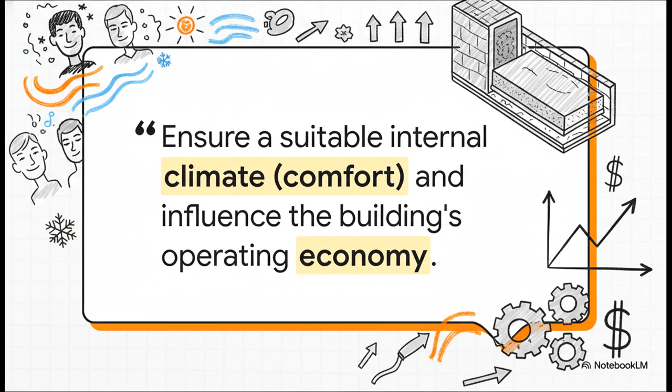All right, next up, you have to speak the language. Nailing these three key terms shows the examiner that you've got a solid grasp of the fundamentals. First is thermal conductivity, or lambda. Now, this is a property of the material itself. It's baked in. Just think of it as how good that material is at letting heat travel through it.

A low lambda value, like you'd find in insulation, means it's a poor conductor of heat. It's like a really thick, effective thermal sweater. Something with a high lambda, like steel, lets heat pass through super easily. This is the starting point for picking your material.

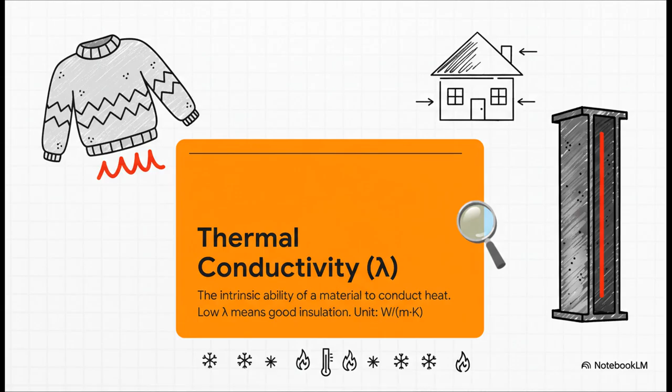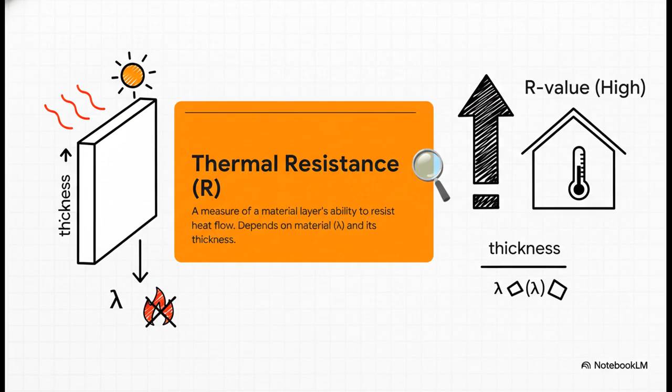Now, building on lambda, we get to thermal resistance, or the R value. This isn't just about the material anymore, it's about how you actually use it. The R value depends on the material's lambda and its thickness. So if you take a great insulator, something with a low lambda, and make it really thick, you're going to get a nice, high R value. This number tells you how well a specific layer in your wall is doing its job.

And that brings us to the U value. Think of this as the final grade for the entire assembly. It measures how much heat gets through a whole section of the building, like a wall with all its layers, or a window, or the roof. It takes everything into account. And for the U value, the golden rule is lower is always better.

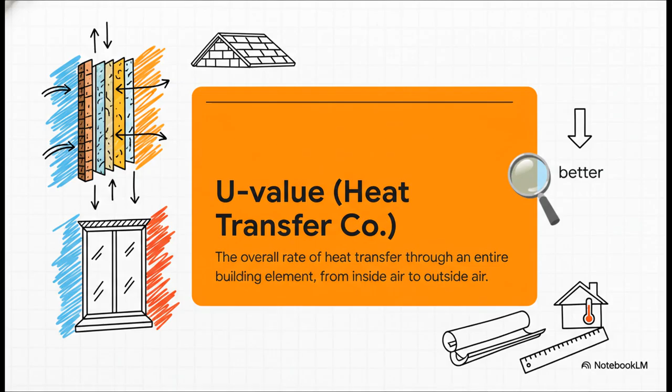It tells you how much energy you're losing, and this is the number that building codes and regulations are often built around. And these terms, especially that U value, are front and center in the official criteria used to evaluate a building's performance. As you can see, the U value is often listed right at the top, but it's part of a bigger picture that looks at everything from airtightness to overall thermal stability.

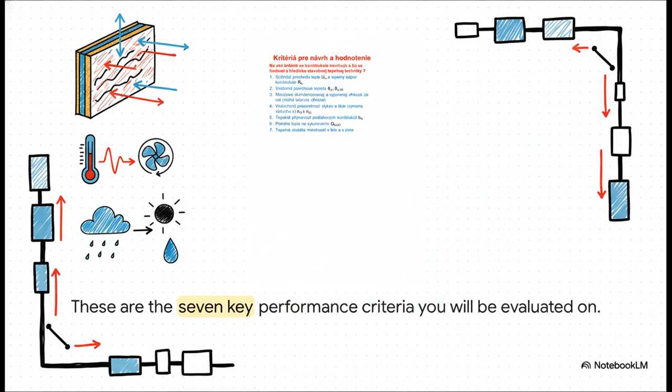Okay, so now that we've got the vocabulary down, let's talk about where things can go wrong. You can design a wall with a fantastic U value, but its performance can be completely ruined by thermal bridges. These are basically the weak spots, the Achilles heel of a building's thermal envelope.

So where do they pop up? Well, they happen anywhere that continuous layer of insulation gets broken, squished, or just isn't there. We're talking about corners, where walls meet floors, around windows, and a classic example is a concrete balcony that sticks right out of the building, creating a direct path for heat to escape.

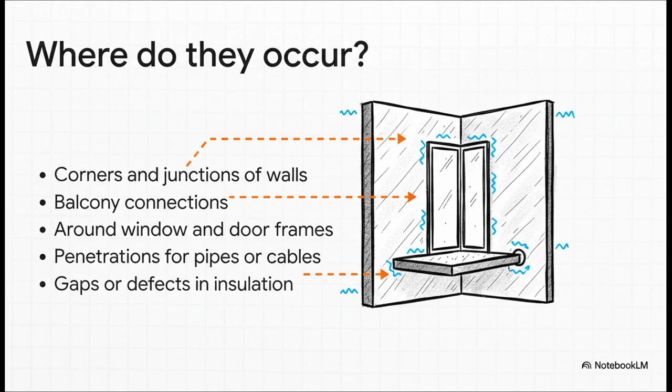This diagram here shows exactly what's happening. On a nice, flat wall, heat flows in one direction, straight out. But at a corner, the outside surface is bigger than the inside one, so the heat flow spreads out and it escapes much faster. It's literally a thermal highway for heat to leave your building.

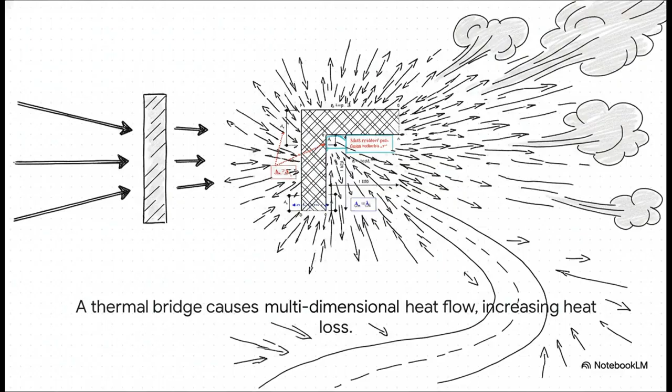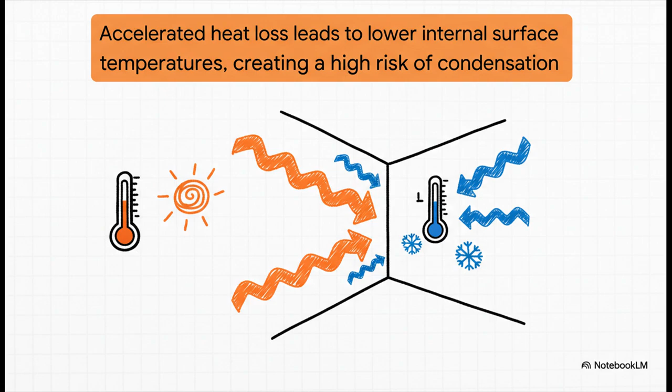And here's the real kicker. Because all that heat is escaping so quickly, the temperature of the inside surface right at that thermal bridge drops a lot. It becomes the coldest spot in the room. And that cold spot sets the stage perfectly for our next big problem. And that problem is condensation.

You see, warm indoor air can hold a lot of moisture, but when that warm, humid air touches the cold surface created by a thermal bridge, the air cools down instantly, and cold air can't hold as much moisture. So that water has to go somewhere, and it condenses into liquid, right there on your wall.

Now, this is way more than just a little fog on a window. When this happens over and over, that moisture starts causing serious damage. It can wreck the strength of materials like wood and drywall, make a room feel damp and unusable, and of course, lead to ugly stains and peeling paint. But it gets worse. Those damp, dark conditions are the perfect breeding ground for mold.

And this is where it gets really serious. Mold isn't just ugly, it releases spores that contain mycotoxins, some of which are actually carcinogenic. So a simple design flaw, a thermal bridge, can lead directly to a serious health hazard. Explaining that cause and effect chain is absolutely crucial for your exam.

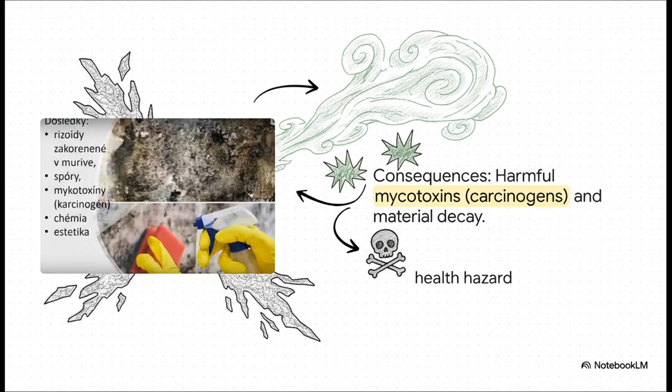Okay, so we've identified the key problems. What's the end goal here? What are we striving for? It's all about achieving thermal stability. And that means designing a building that performs well not just on the coldest day of the year, but all year round. Think about it.

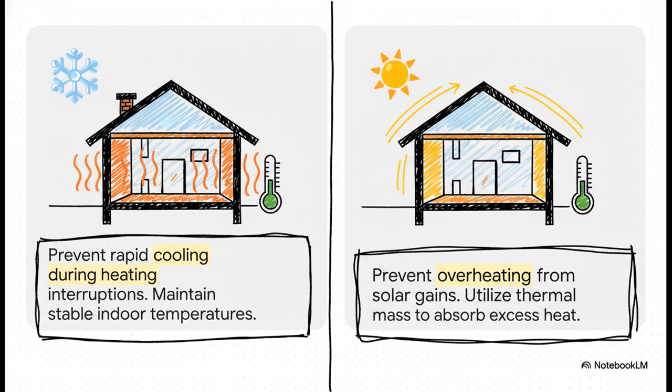In the winter, thermal stability means the building holds onto its heat. If the furnace breaks or the power goes out, a stable building cools down much, much slower. In the summer, the goal is the complete opposite. We want to resist overheating. The building needs to shield the inside from that intense summer sun to stay naturally cool. A great design does both.

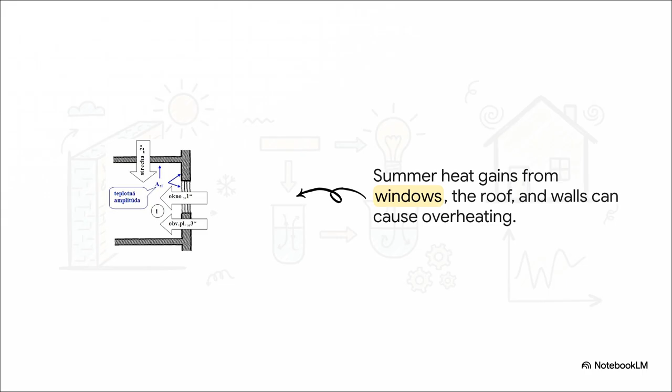Overheating in the summer comes from a few places. You've got the sun blasting through the windows, which has an immediate warming effect, but you also have the roof and walls soaking up heat all day long, and that heat slowly radiates into the building later on. And the key to managing both of these challenges is the building's thermal mass.

Heavy, dense materials like concrete or brick are like thermal batteries. In the summer, they absorb all that daytime heat, slowing it from getting inside. And in the winter, they store heat from your heating system, slowly releasing it back into the room. This thermal mass acts like a giant stabilizing flywheel for your indoor climate.

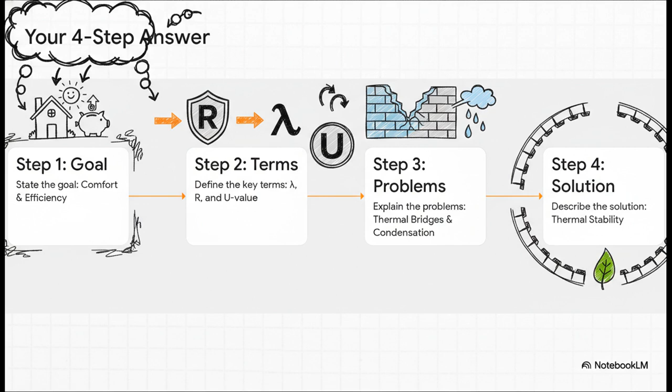Step 3, explain the real-world problems, making that critical link between thermal bridges and condensation. And finally, Step 4, describe the holistic solution, which is designing for year-round thermal stability.

So when you walk into that exam, here's what you absolutely have to remember. Don't just list facts, explain the cause and effect. Always tie the theory back to what's actually happening in a real building. Make that direct, unbreakable link between a thermal bridge, the cold spot it creates, and the risk of condensation and mold. Stress that thermal stability isn't just a winter thing, it's for summer too.

And always, always bring it back to those two main goals, making people comfortable and saving energy. If you can tell that story, you'll be in great shape.